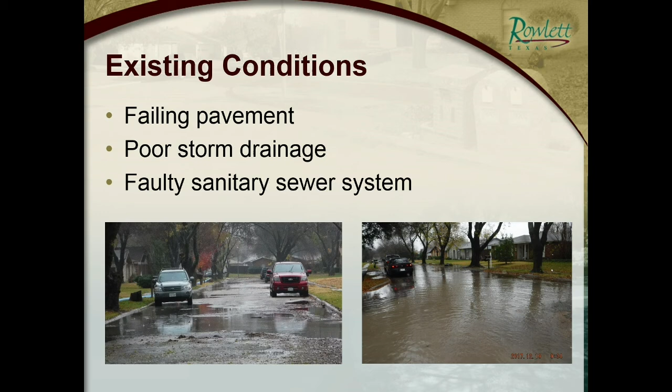In 1979, it was nothing but farm fields, except there were maybe a few subdivisions along the lake, Point Royal Estates. I think this was one of them that was starting to pick up, Dalrock Estates, and then Kenwood Estates. Other than that, it was open land with the downtown area.

So you can imagine when the developers came in, the standards that we had at that time were not the standards we have for construction today. So some of the reasons why we're here where we're at is because the drainage that was put in was not up to our standards today. Anytime you don't have really good positive drainage, that's usually when it starts a vicious cycle and the pavement begins to fail.

As far as the proposed improvements, we're going to remove and replace all the concrete streets with concrete streets. They'll remain the same width that they currently are today. Most of those are 27 foot wide, with the exception of, I'm getting this confused with Dalrock Estates, but all of them are 27 foot wide.

We're going to replace the storm drainage, add additional curb inlets to collect the water sooner so that it gets off the road. We're going to replace the sanitary sewer line, and there's some water services that we'll have to replace that run across the street. Excuse me, I've been battling a little cold.

And then all the sidewalks, they're currently 3 and 4 foot wide, they're going to be replaced with 5 foot wide sidewalks. We're going to add new street lights on decorative poles and fixtures similar to what we have in downtown. And in the areas where the trees are going to be removed, we're going to be planting new trees in their place.

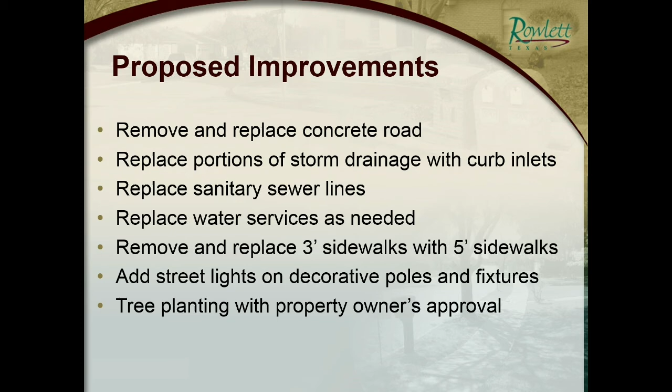When this subdivision was built, they put a lot of the gateway or entry points to market the property. The builders put the trees right behind the curb, and they looked okay back in the day, 40 years ago, when the trees were probably 3 or 4 inches wide. But now you can see they've grown and they've contributed to some of the problems we have with the pavement.

This is just an engineering section of the street. If you basically take a saw and cut it through the street, this gives you a little indication of what we're going to do as far as the street section.

We're going to replace the streets. Currently they're anywhere from 5 to 6 inches, and in some places we found where they're 4 inches, where the contractor didn't complete the job like they should have. We're going to replace it with 8-inch paving, so that provides a 13-foot wide lane in each direction.

We're going to restabilize and rework the subgrade that supports the pavement to make it stronger, give it more strength, so that the subgrade that holds the pavement will support it better and give it a longer life. That's some of the upgrades we do in our construction details. And again, I talked about the 5-foot walk on either side of the roadway.

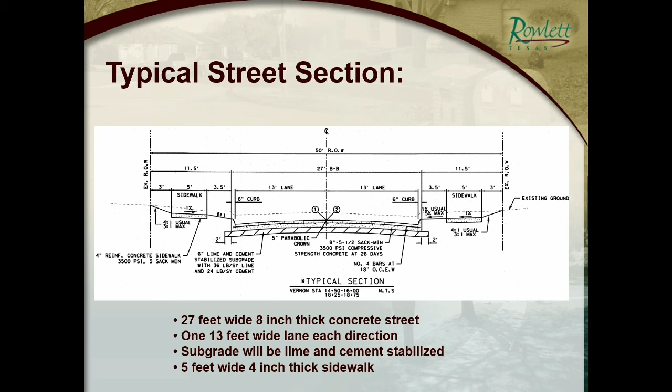This is a map showing the limits of the project. As you can see, it's the streets in red. This is part of the 2015 bond project.

Because of the size and scope of all the streets that the city has that need to be reconstructed, we have limited resources. So we broke this up into 2 phases, with phase 1 being in 2015, with the goal of phase 2 being in 2018. I'll get more of that detail here in a little bit.

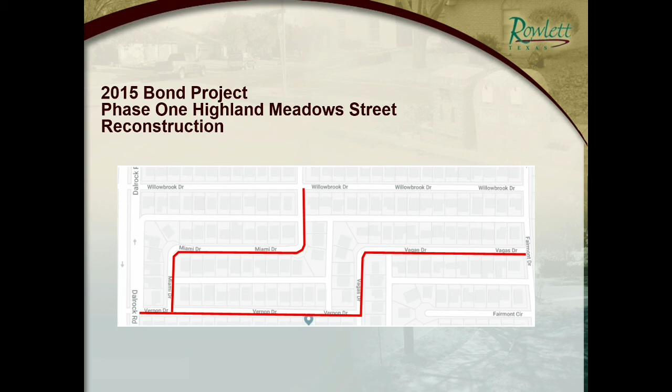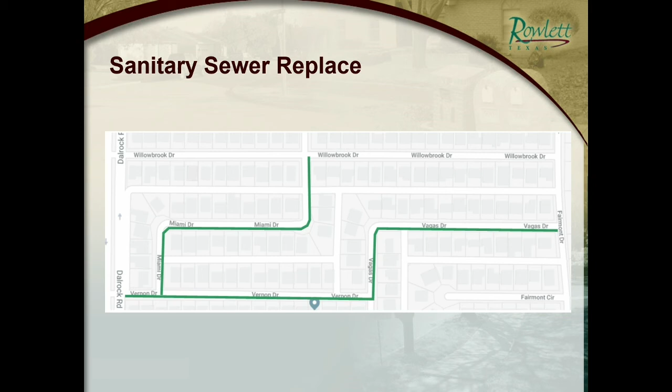The board that recommended the projects looked at the second phase of this project, as well as Dalrock Estates and South Ridge and Lake Country, the subdivision right behind us. They've deemed those projects priority for the next bond election to fund. So I say that because if council decides to call a bond election, which we'll know probably within the next couple of weeks, I'd encourage you to get out and vote one way or the other for the phase 2 project when the election comes in May of this year.

As far as the schedule is concerned, this is going to be broken out in several areas. The contractor does plan to begin work next week, with basically coming out on site and assessing it, setting up some erosion control, and mobilizing, without doing really specific work until later in the week or the following week.

They're going to start with Vagas and Vernon and finish that up around the October time frame. And then they'll start on Miami and finish that up in October as well, and do their final cleanup and get done by November of this year is the plan.

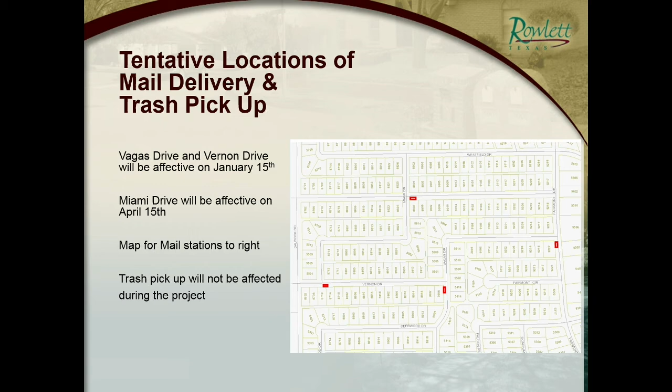Some of the other construction issues: we're going to have one-way traffic, because when we take that half of the pavement out, it only has one lane that we can travel down for a car. You're not going to be able to park on the street, unfortunately, because we've got to have room for people to go, and we've got to keep that access for emergency purposes as well, in case somebody needs to call the ambulance or for fire or police.

There's going to be some temporary water and sewer service disruptions as we lay the new service lines for the water. Sewers shouldn't be disrupted too much. We'll let you know if we have some problems, but usually we can work around that fairly easily without disrupting your service. It's mainly the water.

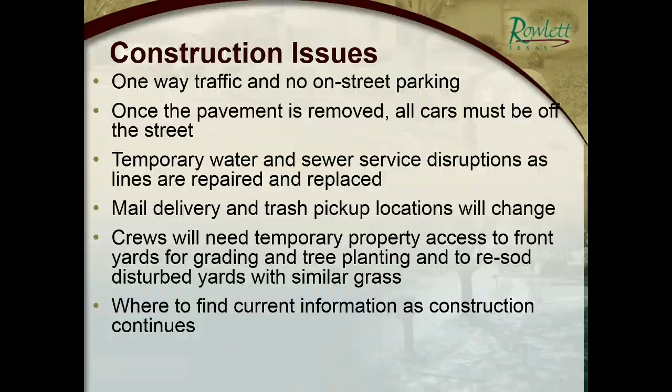The crews are going to need temporary access to the property to regrade some areas from the back of curb and the sidewalk to your front yard. There's 11 feet from your property line to the back of curb that is city right of way, which the city owns although you maintain it. So they're going to have to get in that area and may possibly have to get on your yard a little bit to grade, and we'll get a right of entry for that.

After all the paving is done and the work is complete, they're going to go back and sod the disturbed areas with grass that matches what you have in your yard. If it's like my yard, which has both St. Augustine and Bermuda, we're going to ask you which one you want, because sometimes that St. Augustine takes over some of the Bermuda. That'll be some of the issues Mr. Masai will be working with you on.

The last bullet point is, as far as construction continues, as I mentioned before, with the Facebook page, we'll also be sending out notices as they present themselves when we're switching traffic and stuff.

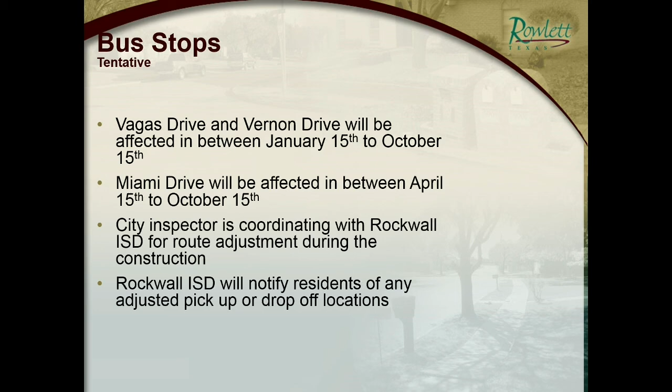Glad we're getting to the end, because I'm just about out of voice here, but bus stops with Rockwall ISD could definitely be affected as well. We're working with Rockwall ISD now to determine where those locations are going to be changed if they're going to be affected. So we'll have additional information with that.

If you know of anybody with special needs or considerations, we've run into this in other neighborhoods, feel free to let us know so we can reach out to them if they're not here tonight, or if we haven't had a contact, so that we can provide any additional service to them as needed.

As mentioned before, this project includes new trees where some of the other ones will be taken out. We've budgeted 2 trees per lot. Some people may not want a tree, that's okay, we're going to get your permission to plant that. They're going to plant the tree on the property line, probably 3 to 4 feet behind the sidewalk.

The contractor will plant 1 to 2 trees with the species of your choice, and we've got pictures of what those trees look like. They'll be 2 to 4 inch caliper trees. The contractor will water those while he's on site and mobilized. Once he leaves, the watering will be the responsibility of the property owner.

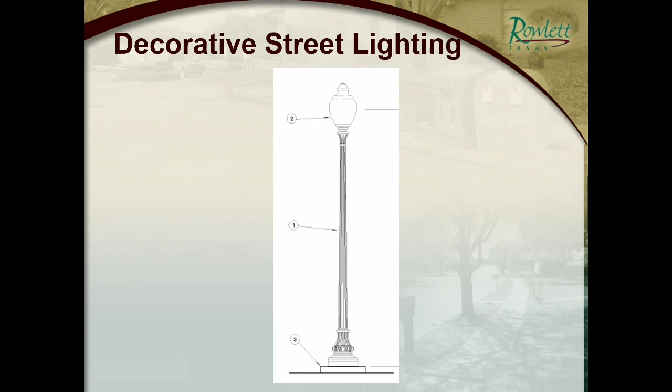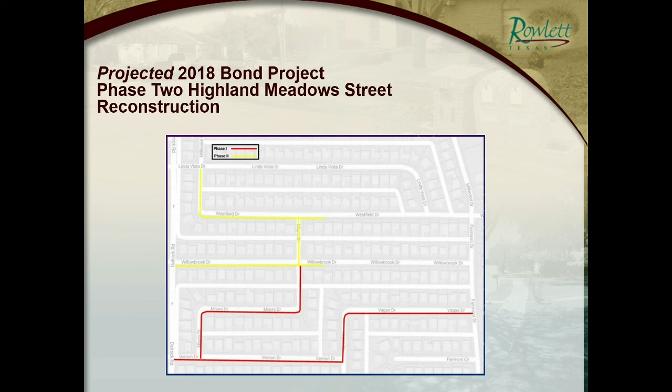So that way on Vagas is kind of way too, right? It's just this little area. I've got the map up here. Vernon, and then you go left. The map is up on here. The lines in red is what the project of this scope is going to be. The lines in yellow, they're designed. The engineering firm that did this project designed it. So the goal is if the bond election is successful in 2018 in May, since it's designed already, we can just go straight to bid, and it'll be sort of seamless. This project will be wrapping up, and we can go into phase 2.

Because I have 2 kids living with me with 2 extra cars, so they can actually park that way on Vagas, probably. That's a problem there, 4 cars. And so anyway, that way it'd be okay for them to park on the street. And then the third part, you can park on the areas that we're not disturbing.

Thanks, we got one more. How much longer is it going to be for the water lines to be in? They are going to wrap up probably within the next week or so. We have the boring machine that we were using to pipe burst it so that we didn't have to dig things up, it's trenchless technology. It malfunctioned, so we're going to have to do the rest of it open cut.

Okay, because I'm on the circle at Miami, and they started at one end, and then went around my circle, then on to the other end. Yeah, we had a water leak on that end, so we stopped where we were at that one location and went back up where we had the water leak. That should be wrapping up, the city staff is doing that. Our crews are doing those in-house. And obviously we want to be out of the way before the contractor gets in there.

I know we're talking about streets mainly, but is there any talk on improving the alleyways? The entrance and exits to the alleys? The city currently has an alley pavement management program. And again, it's another need. If you can imagine all the alleys that we have, we've got probably 105 miles of alleys. Half of them need to be reconstructed. That's a large task.